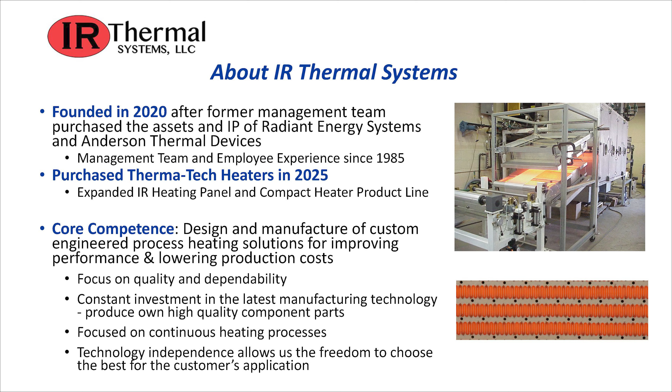So how do we help? We build custom process heating solutions: preheating, drying, and curing applications, hot air systems, IR systems and heaters, combination hybrid IR and hot air systems, where we use IR as a booster. With infrared, we increase line speeds, reduce energy costs, and save space. We can level out uneven temperature or moisture across a web, and we can heat selected zones across a web.

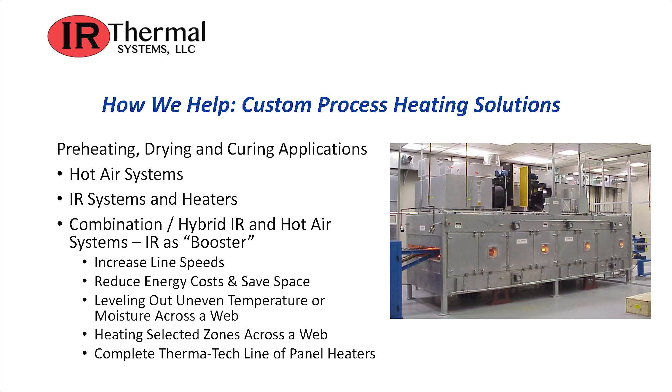And it is made easier, and we have a wider range of products available now that we have the complete Therma-Tech product line of panel heaters of different sizes, where we can put those heaters where they're needed in your process. So we serve a wide range of industries: converting, paper, film, and foil, printing, nonwovens, plastic, adhesive lamination, batteries, medical devices, filter media, fiberglass, advanced composites, industrial fabrics, automotive, packaging, wire and cable, textiles, and many other industries.

So our three major applications for continuous processes include drying, solvent evaporation, and curing, where a final web or coating temperature requirement normally follows a drying requirement, like modern paints and powder coating. We also have heating, raising the temperature of a product, for applications where we require heat set, heat before lamination, or 100% solids applications like silicone coating or foils, and also metals.

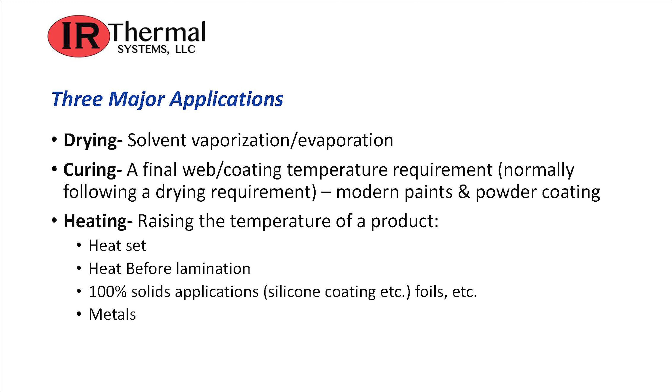So why choose IR heating? Well, infrared heating systems are more efficient with lower energy requirements for the same results, so the energy cost savings can be significant, and more companies are installing this technology to be more green. Energy is directly transferred from the heater to the target object for a higher heat transfer rate, and they're available in electric or gas powered.

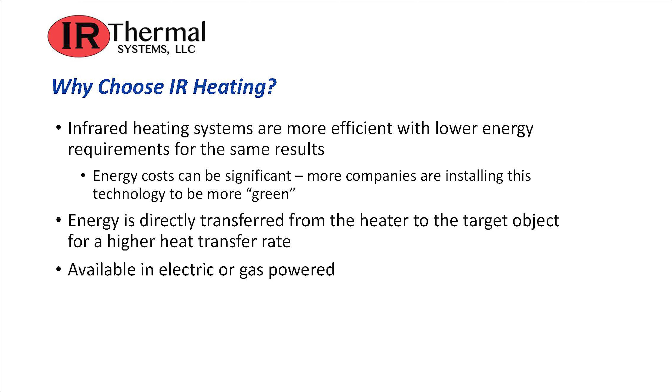So general infrared heater characteristics: the heaters are easy to zone for uniform heating of the product and width changes, fast response to changing process conditions including quick startup and shutdown in most styles of heaters, lower initial capital and installation cost including floor space savings, and often added to existing conventional dryers and ovens to increase line speed and improve process quality.

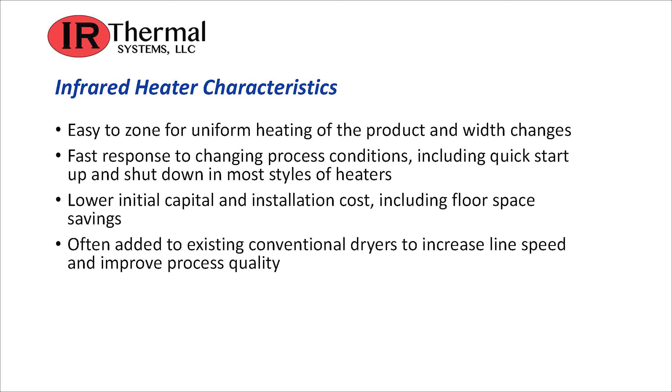So there's a wide range of different wavelengths available, from short wave to long wave with medium in between. The heating temperature is dependent on the wavelength. The wavelength used for industrial infrared heating applications ranges from 1.17 micron, that equates to 4,000 degrees Fahrenheit, to 5.4 micron, 500 degrees Fahrenheit. Short wave emitters are typically lamps, they go from 2150 to 4,000 Fahrenheit. Medium wave emitters, 900 to 2150, and long wave emitters from 500 to 900 degrees.

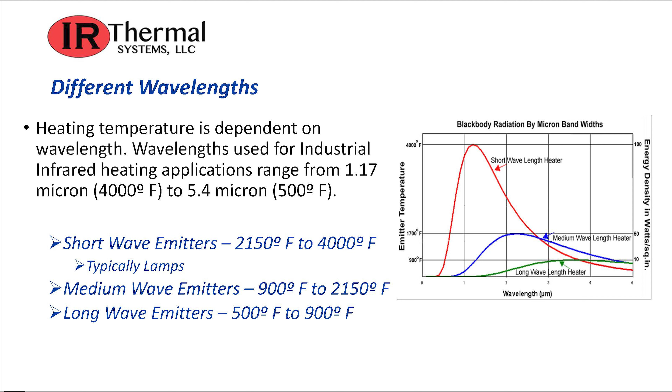You select the wavelength based upon what you need in your process. That's where we can help you on the application side. In general, you would say that medium wave heats more of the surface and short wave can penetrate deeper into the product for heating. So you choose wavelength based on the application.

You can see some of the absorption factors of the different materials. On the left, you have water film thickness at 10 micron. You have your absorption factor there at 3, with peaks at 3 and 6 micron. PVC sheet thickness at 1 millimeter has somewhat different peaks, so you could adjust, or require, the heating elements to be adjusted for the wavelength needed for your application.

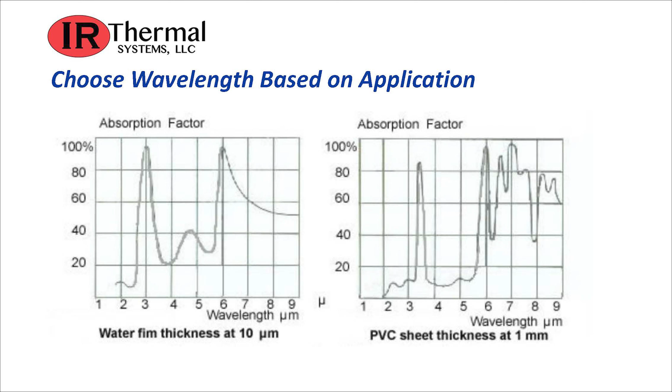This heater is typically used for heating webs and plastics. It's in the 3 to 8 micron range, which is an ideal range for absorbing water. We make everything here—this heater, we make the elements, and we pin them on the boards.

Some boards have holes in them for airflow through the heater to aid in the heating process and break up the vapor barrier. These heaters can be sold individually to customers or incorporated into an oven system complete with framework, doors, and controls. They can be controlled by thermocouples internally in the heater or by infrared thermometers measuring the temperature of the material moving under the heater.

Generally, these are 2 to 3 inches away from the product, which can be horizontal or vertical, any direction. They are known for fast heat up and cool down.

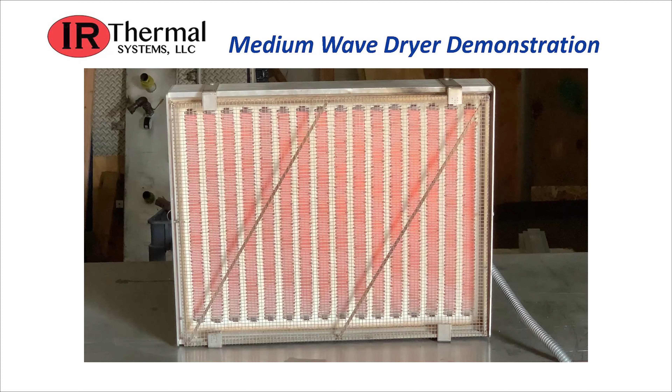As you can see, the elements are similar to the elements in your toaster oven—it's the same wavelength. So if we shut it off now, you'll see how quickly it cools down. In addition, if we had air blowing on it, we could increase the velocity of the air to help cool down the material underneath the heater so that it doesn't get damaged.

Next up is the shortwave heater that we're going to demonstrate. This is one of our heater cassette style or enclosure style units with lamps that we produce, and this will show you a little bit of the difference with the way shortwave works with a lamp assembly.

Now we're going to demonstrate the shortwave infrared heater. It's in the 1.5 to 3 micron range—it's a quite intense heat in a small package. This particular unit has some air holes for aiding in the heating process and breaking up a vapor barrier.

The lamp itself is made of tungsten inside, with a gas that's in a sealed quartz tube. These elements can get up to 3,500 degrees versus 1,800 degrees on the medium wave.

So now we'll go ahead and turn it up, and we'll bring it up slowly because it does have a high inrush. So if you're using an SCR like we are, you want to make sure you have a little bit of a delay so that you don't blow fuses. We use high-speed fuses on the SCRs to protect them.

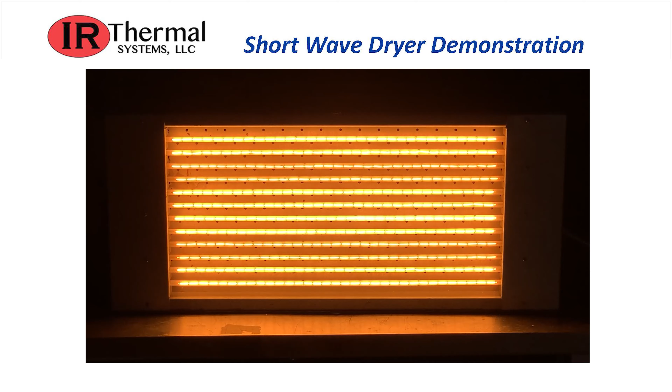Shut that off now. As you can see, it's an intense amount of heat in a very small area—quick heat up and cool down. The thing about these is that you can't control them with a thermocouple internally because the lamps are sealed. The best way to do it is with an infrared thermometer measuring the temperature of the material being heated.

So next up are infrared heaters—we have gas versus electric that we'll talk about now. The electric heaters have a wide temperature range with better turn down, with infinite temperature control and tunability. They operate in a range of 10 to 55 watts per square inch.

So gas infrared heaters—the difference is that there's a higher density of heat that allows higher temperatures and high intensity heat in a small package. That's up to 50K BTU per square foot, or 60 to 100 watts per square inch—so more intensive medium wave heating.

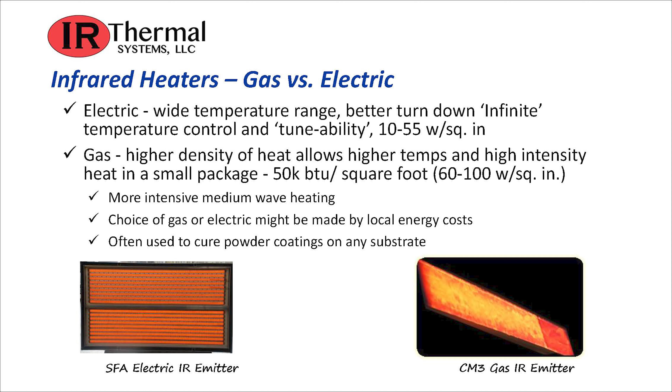The choice of gas or electric might be made by local energy costs. A lot of times, your local energy costs and the comparison will decide what you're going to do in that plant. They're often used to cure powder coatings on any substrate.

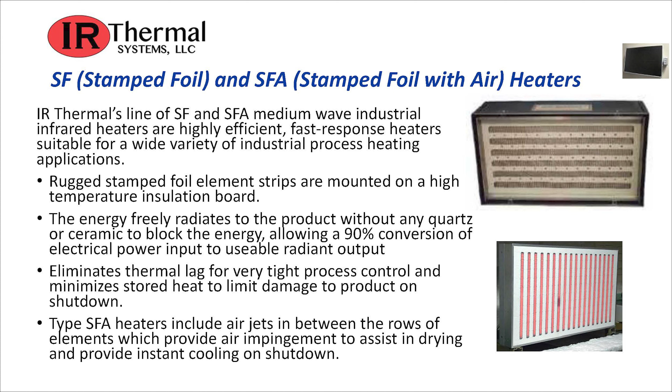Next up, to explain a little bit more about our product lines: we offer what we call the SF and SFA—stamped foil and stamped foil with air heaters. This is a full product line of modular panel heaters and heater modules. They can be used as booster heaters and strategically placed in existing processes. Optional face materials make the heaters suitable for food applications or corrosive environments, and they're manufactured by IR Thermal with proprietary heating elements.

Here's a little bit about our new Therma-Tech heaters—it's a line of smaller heaters designed also to be put into larger processes with the same type of different face materials. And I have Kurt Leach here on the line. I'd like to have him talk about how these are placed in certain processes and can improve the performance of existing dryer processes. Kurt, are you there?

Okay, can you hear me? Yes. All right, let's see if you can. Yeah, there we go, sorry about that.

A lot of machine builders have equipment that is quite compact, and this line of heaters is designed extremely with the intent of being able to fit a lot of energy into a very small space. The range of applications is really up to the imagination, anything from shrinking shrink tubing on conductors in a continuous fashion to food applications we get involved with. This is an ideal design, and we can meet any specifications because we build everything in-house. We don't depend on outsourcing for this product line.

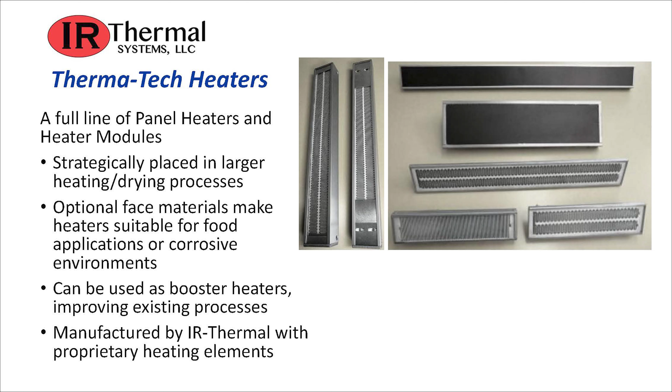Does that cover what you wanted, Gene? Yeah, absolutely. One of the things I wanted to point out that's unique about this product line is our ability to make these in pretty small form factors. That allows us to install them in existing processes, and gives us the flexibility to improve those processes by strategically placing these heaters where they'll fit and improve the temperature, consistency, and quality of the product. That's one of our strengths. You can contact us with your application, and we can help you out.

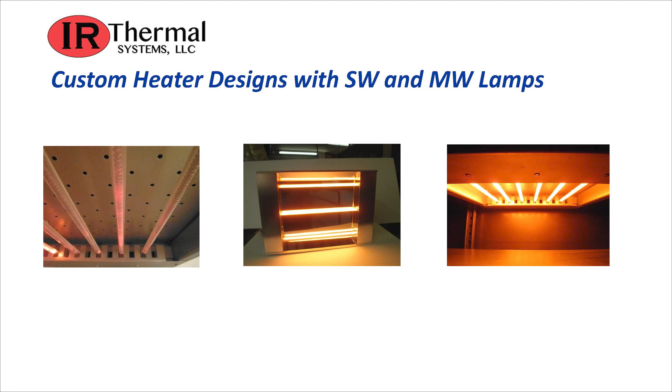One of the things we also do is build these custom heater cassettes with different lamps in them for different applications. We've done many versions, but it's based upon the temperature requirement and what is needed by the customer.

So I just want to go over in general some of the infrared heater applications we've worked on. We've seen them used for industrial drying, powder coating and paints, coating, annealing, filter media, nanofilms, battery, and fuel cell materials.

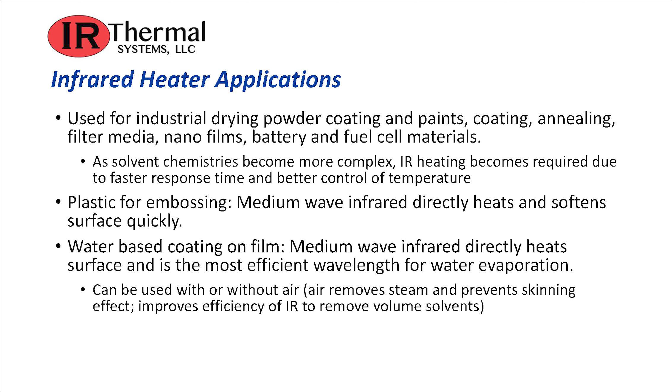Today, as solvent chemistries become more complex, infrared heating becomes required due to faster response time and better temperature control. Also, for plastic embossing, medium wave infrared directly heats and softens the surface quickly. For water-based coatings on film, medium wave infrared directly heats the surface and is the most efficient wavelength for water evaporation, and it can be used with or without air. Air removes the steam and prevents the skinning effect, improving the efficiency of infrared in removing volume solvents.

Infrared is also used for adhesives, impregnated fiberglass, and food applications. It's also used to improve paint quality, since new coating methods require consistent high heat for proper curing.

In metal processing, infrared emitters can be precisely adjusted to the product and process. Medium wave IR dries faster on the surface, while short wave IR tends to penetrate deeper. High gloss metals reflect very strongly, while dark surfaces absorb heat well, and each metal absorbs heat differently. Flat sheets or solid blocks heat up at different rates. In general, infrared improves the energy efficiency of drying applications.

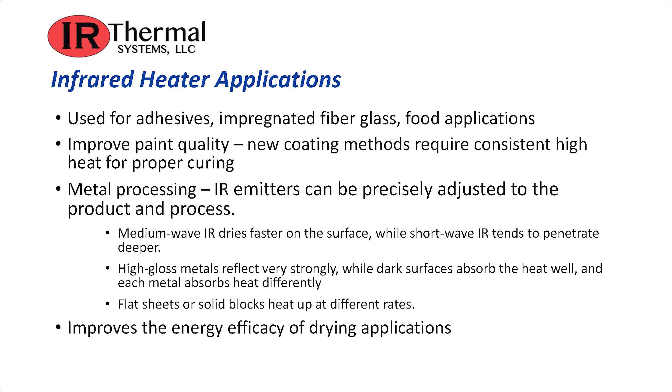So getting to know IR heating, if you're not familiar with it, it's essential to run trials in a lab or on a pilot line to confirm dryer sizing and the desired finished product. We found some coatings may not be able to take advantage of the higher rates of heat transfer and may skin or blister, and may be difficult to work with on temperature-sensitive substrates. Since infrared is basically a surface phenomenon, it's sometimes harder to dry heavier coatings without overheating the surface. We have a rental program that allows customers to deploy infrared at low cost to learn, which helps a lot of our customers.

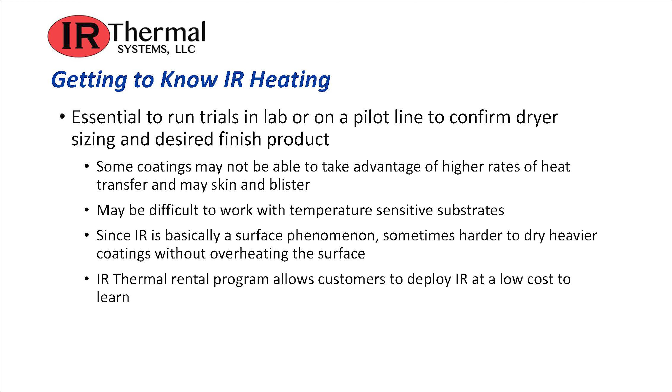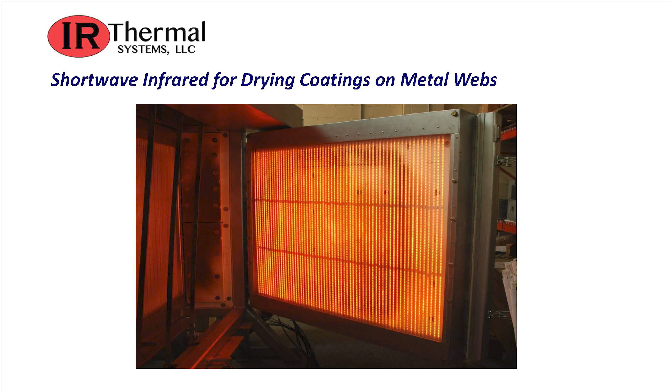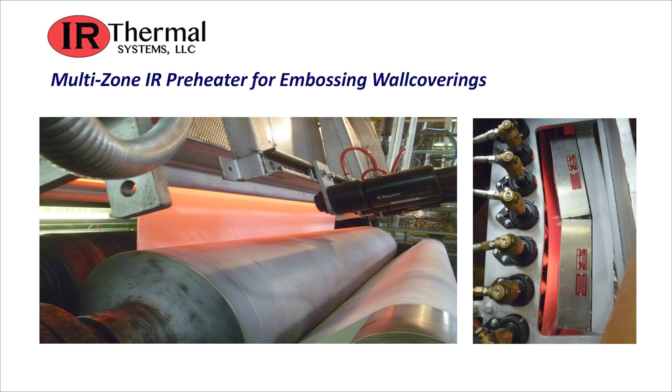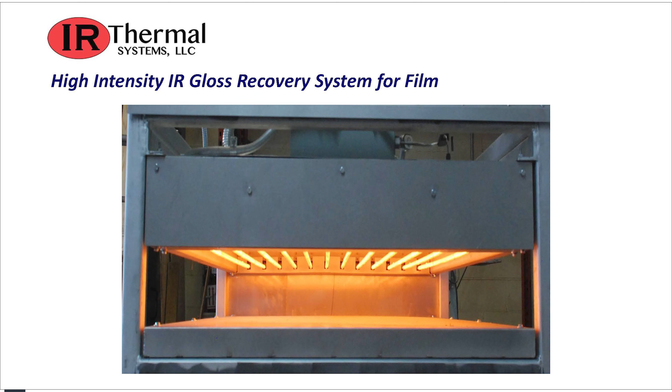Here is a multi-zone IR preheater for embossing wall coverings, a great example of one of our smaller panel heaters. You can see on the right how they're installed in the system. It's a great way to use our products. Here's a high-intensity infrared gloss recovery system for film. We've built this enclosure for the lamps to produce the desired effect.

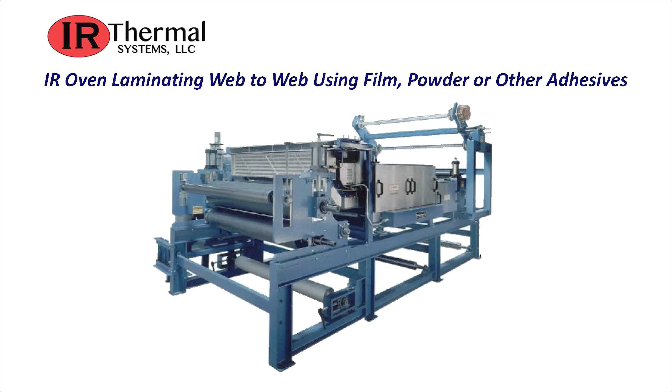And here's an infrared oven laminating web to web using film, powder, or other adhesives. That's another large piece of equipment—an entire IR heating system that we've built.

So let's talk about one last subject: combination and hybrid heaters, where we combine different heating methods. We do two different types: combination convection and infrared, and even combination electric and gas infrared. But in many cases, the infrared section is used as a booster to existing processes.

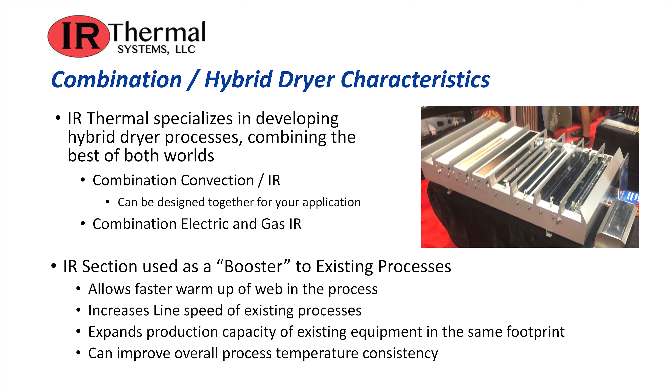We have a lot of experience here helping customers improve their existing processes. That allows faster warm-up of the web in the process, increases the line speed of existing processes, expands the production capacity of existing equipment in the same footprint, and can improve overall process temperature consistency. It's often been used to solve specific customer quality problems.

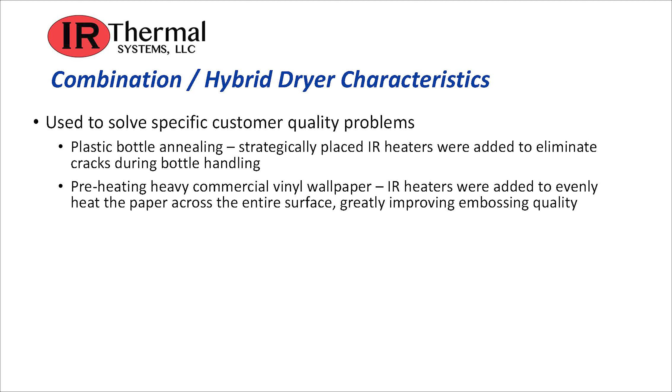We've had two larger problems we've solved. One at a customer that was annealing plastic bottles—we strategically placed infrared heaters to eliminate cracks during bottle handling. In another application, we preheated heavy commercial vinyl wallpaper. Infrared heaters were added to evenly heat the paper across the entire surface, greatly improving embossing quality.

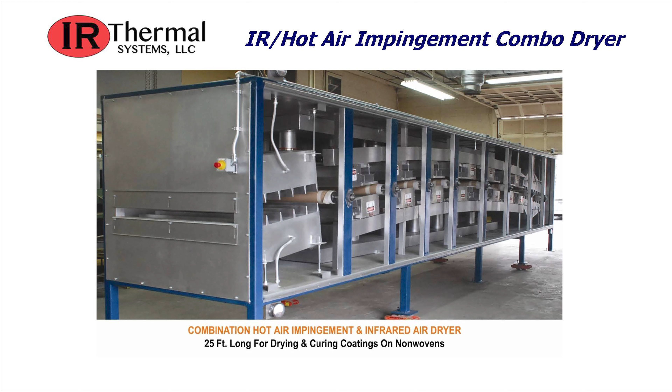Here's a couple of examples of equipment we've built. Here's an infrared hot air impingement combo dryer with infrared preheating. And here's another example with an infrared and hot air dryer combination for drying water-based PSA on PE film.